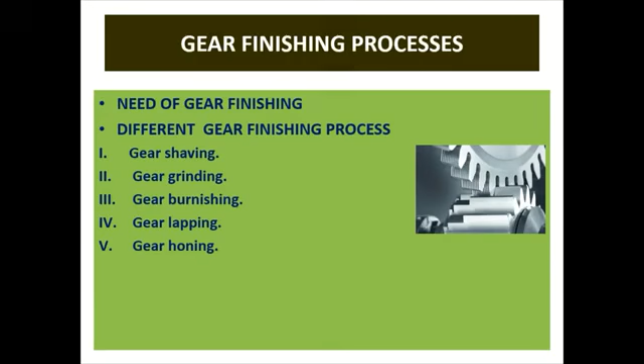Hello friends, today we are going to see the gear finishing process. In that we'll cover the following topics: need of gear finishing, different gear finishing processes. The first one is the gear shaving process, and the gear grinding process, gear burnishing process, gear lapping process, and gear honing process.

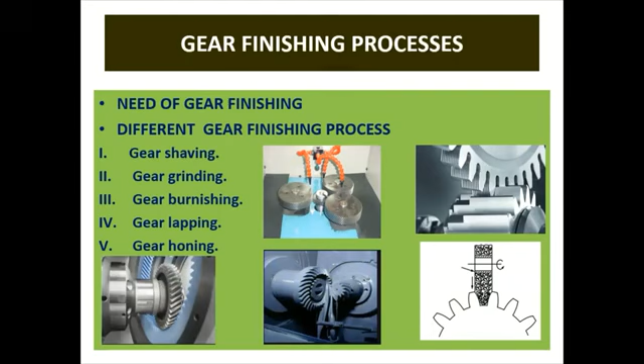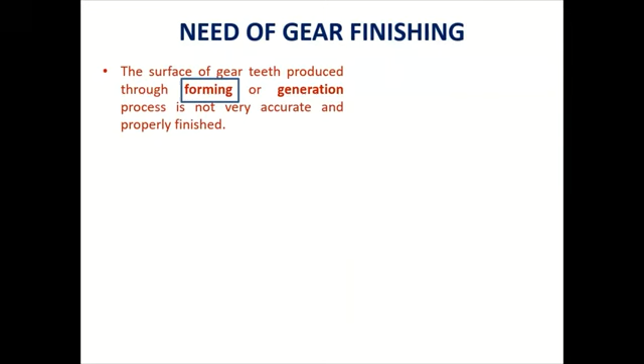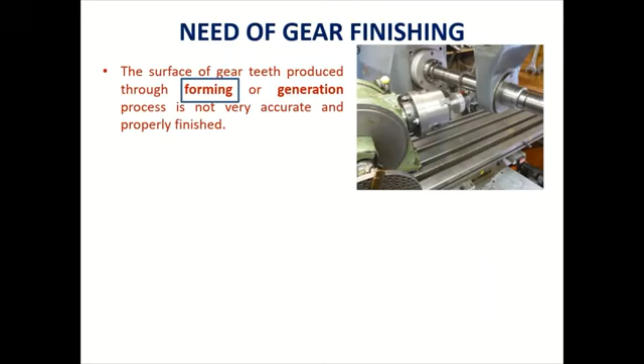So, need of gear finishing. The surface of the gear teeth produced through the forming or a generation process is not very accurate and properly finished. When we talk about gear forming, it means the gear which we have generated on the milling machine or a broaching machine. The other one is the gear generation process, like gear shaping or gear hobbing, on which the gear has been produced. So in both methods, we are not getting a highly accurate finished surface or gear.

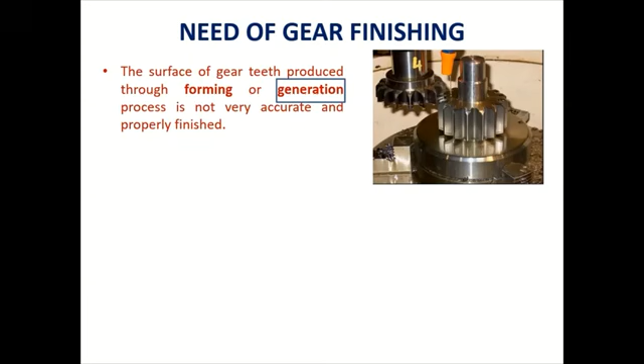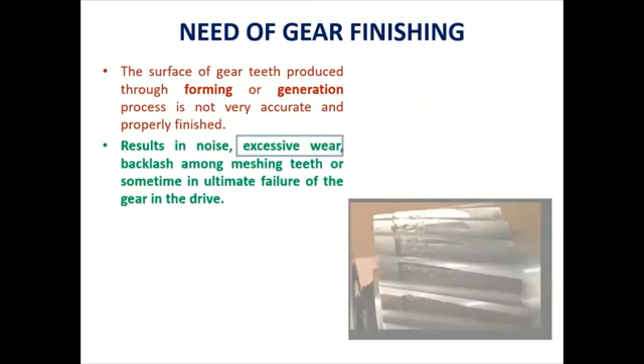Due to that reason, noise will take place between the two gears, or there may be excessive wear. You can see from this diagram, or even backlash between the two gears will take place. And many times the tooth may fail as proper finishing is not there. Even high load may act between the two flanks. So in such cases the failure may occur.

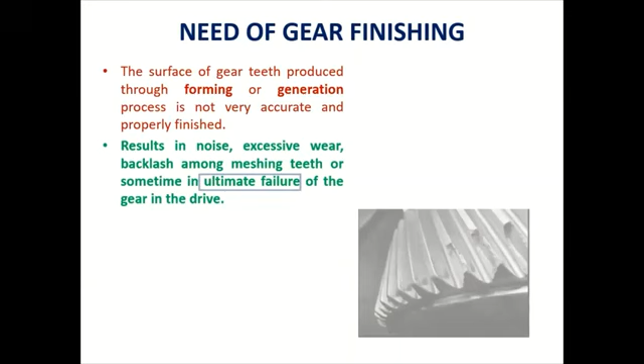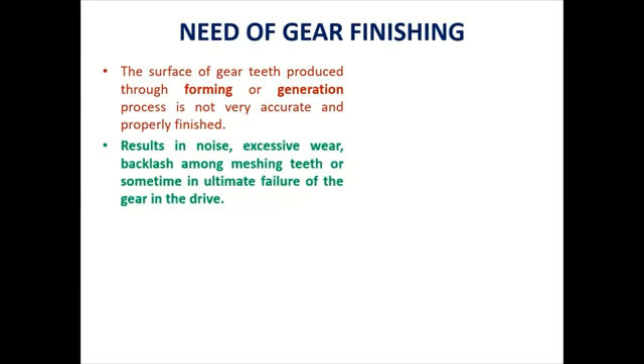So due to that reason, gear finishing is required. Even for smooth running, gear finishing is required, or to achieve high surface finish, or if you want to increase the life of the gear. So for all these reasons, gear finishing is very important.

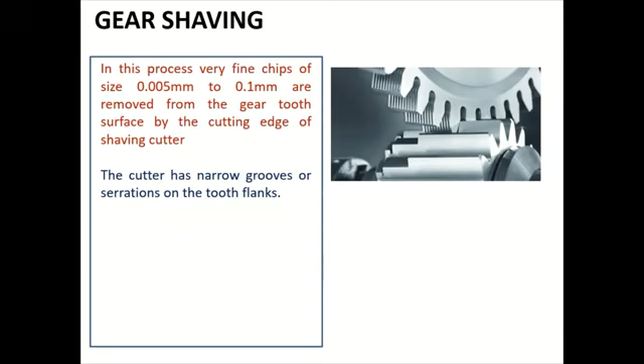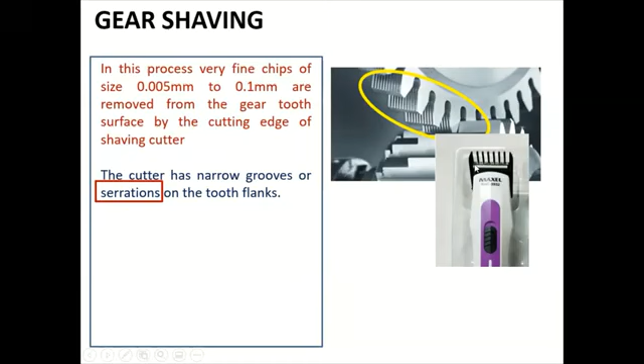Then the gear shaving process. In this process, very fine chips of size 0.005 mm to 0.1 mm are removed from the gear tooth surface by the cutting edge of the shaving cutter. You can see from this diagram, this is a shaving cutter which looks like a pinion. Over the flank there are narrow grooves, called serrations. This is a shaver, and over that there are a number of serrations we can observe. So this is what the serrations are.

The gear to be finished is meshed with the gear shaving tool, which is in the form of a rack or a pinion, and is also reciprocated simultaneously. First, in this diagram, this is the rack shaving cutter, and the rack cutter will move in a linear motion. The gear which has to be finished and the rack shaving cutter mesh with each other, and reciprocating motion is given, so that ultimately it results in finishing of the gear.

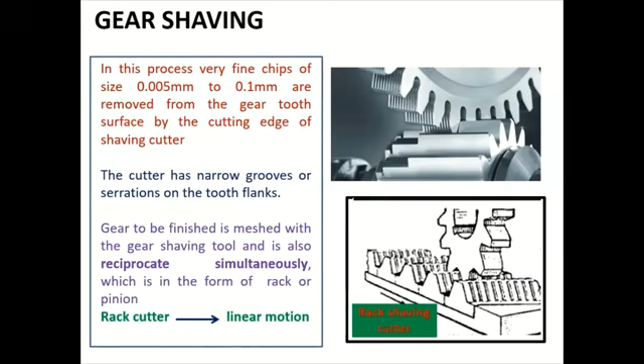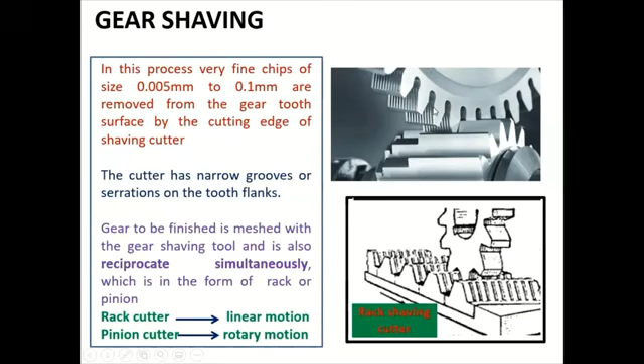Here this is a pinion cutter. In this case we are giving rotary motion to the shaving cutter, that is the pinion cutter. Again I'm showing the diagram of the serrations on the pinion. Here also a number of serrations are there on the shaving cutter.

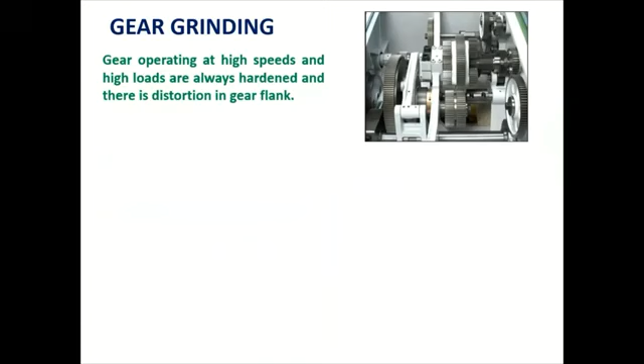Gear grinding. Gears operating at high speed and high loads are always hardened, and there is a distortion in the gear flank. In this diagram, this is a paper mill, or cotton mills, in which very high load or high speed is always required. Due to that reason we go for the hardening process on the gear. When we do the hardening, distortion will take place over the flank. This distortion we have to remove.

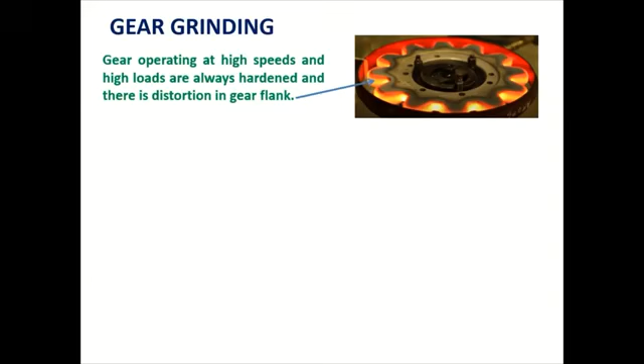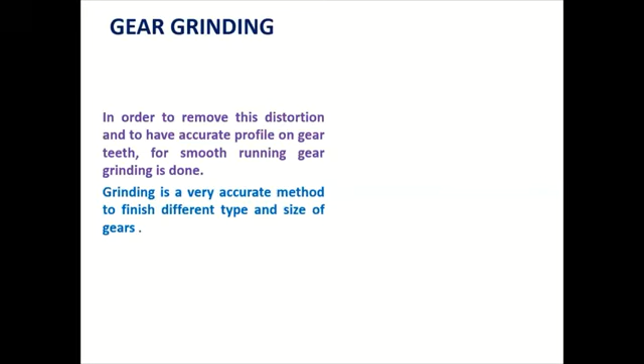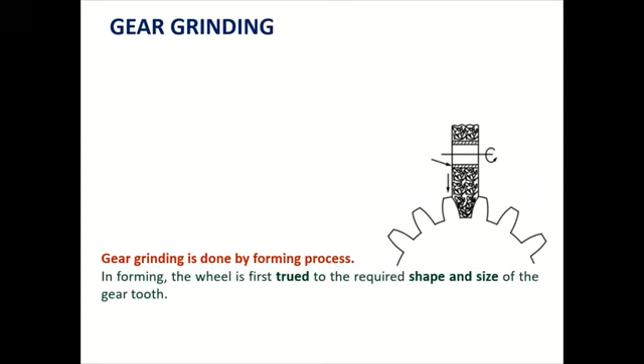In forming, the wheel is first trued to the required shape and size of the gear tooth. You can see on this diagram, we are giving the same profile as that of the gear to the gear grinding wheel. That is called truing, meaning we true the grinding wheel with respect to the shape and size of the gear tooth. So this is the forming grinding wheel.

The gear is mounted on an indexing head and the grinding wheel is fed to the required depth. Here this is the gear which has to be finished, mounted on the indexing head, and this wheel is fed against the gear to the required depth, and then the grinding wheel rotates. Once one particular tooth has been finished, we go for indexing of the gear, rotating it by one pitch, and again the grinding process takes place.

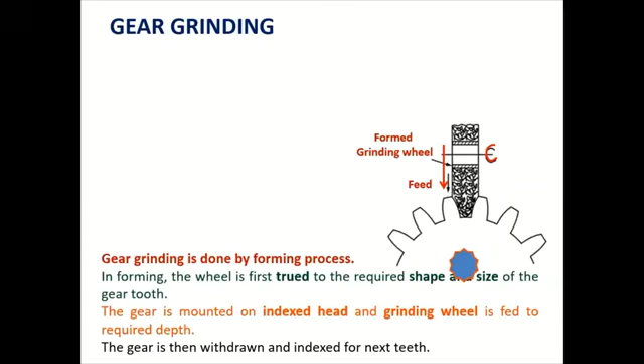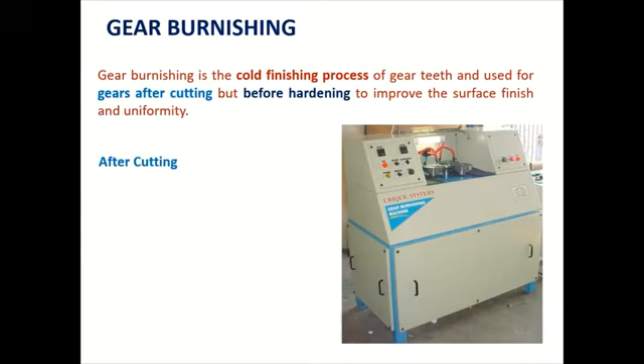Gear burnishing process. So this is actually the machine for gear burnishing. Gear burnishing is a cold finishing process of gear teeth and used for gear after cutting but before hardening to improve the surface finish and uniformity. Means when we are producing the gear on the milling machine, so this is just I'm showing that, means we are producing the gear on the milling machine, right?

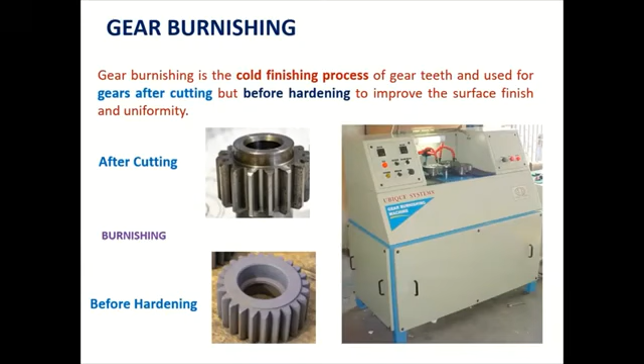And before hardening, so between that we are going for the burnishing. Means the gear burnishing will be done before the hardening, right? That is the meaning of that. So this is the setup of the gear burnishing.

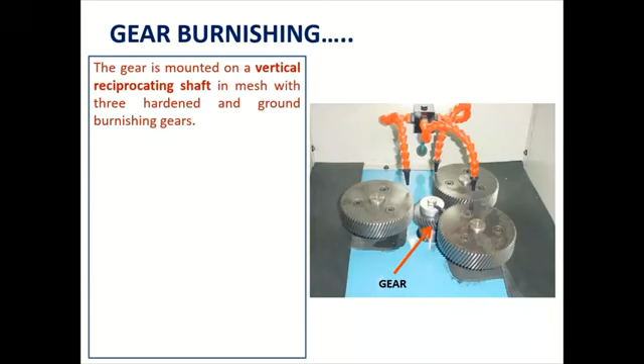In this case, the gear is mounted on the vertical reciprocating shaft and is meshed with the 3 hardened and ground burnishing gears. So you can see in this diagram, these are the 3 hardened and ground burnishing gears. Okay, and they are also mounted on the vertical reciprocating shaft. Means the gear which is to be finished and the burnishing gear, both we are mounting on the reciprocating shaft.

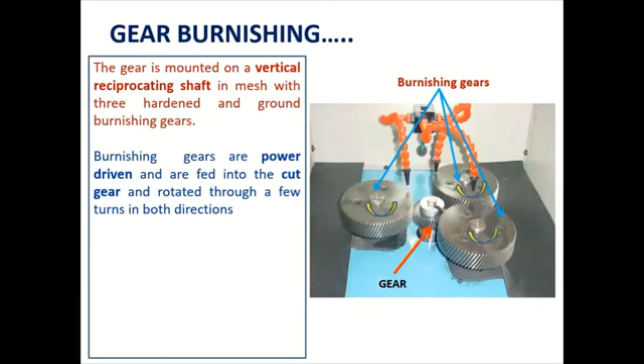Burnishing gears are power driven and are fed into the cut gear and rotate through a few turns in both the directions. So here we are giving the motion, means rotary motion to the burnishing gear, which are in mesh with the gear to be finished. Okay, so in both the directions we can rotate, means clockwise and anti-clockwise.

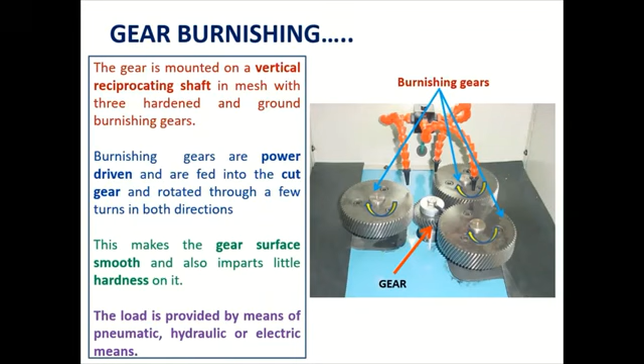This makes the gear surface smooth and also imparts a little hardness on it. So this is the advantage here, because more load will act on the gear, and due to that reason, as there is more friction, naturally the hardening will automatically take place on the gear. So for the load which is provided, we can use pneumatic or hydraulic systems or electrical means also.

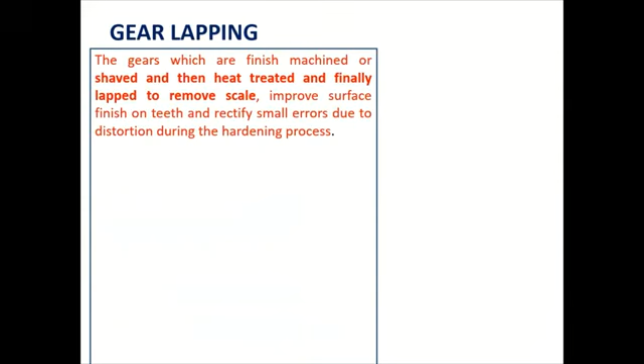What it means? So first of all, when we are generating the gear on the milling machine, right, or even on the gear shaping machine or a gear hobbing process, in that case, basically what we are doing, we are going for the shaving process. So after shaving, we are going for the heat treatment process, and then we can go for the lapping process.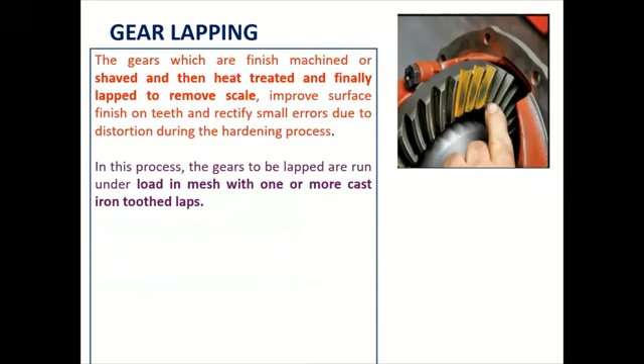So in this process, the gears to be lapped are run under load in mesh with one or more cast iron toothed laps. So I am showing this diagram here. This is the gear where we have to go for the lapping, and this is the cast iron toothed lap, and both we are meshing with each other, and between these two we are using abrasive particles, okay, or abrasive paste, which is introduced between the two running gears.

Now a negligible amount of metal is removed during the process. That's why I'm saying that in microns we can remove the material. So gear lapping helps in improving the surface finish.

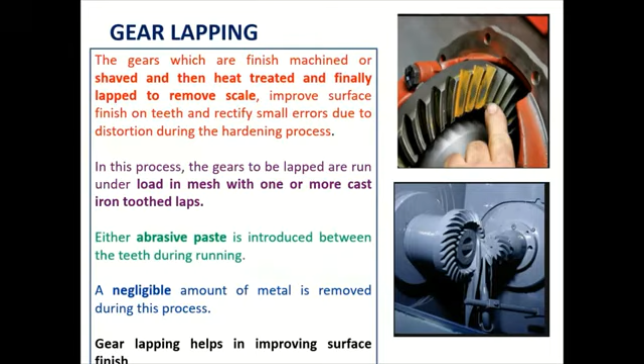Gear honing process. Gear honing is a particularly effective method of removing the nicks, scales, and burrs from the profile of the teeth after heat treatment by a gear tooth hone, which is an abrasive embedded plastic helical gear shaped tool. Means you can see in this diagram here, this is a hone tool. Means it is just like a ring. That's why it is called a hone ring, right? But it looks like a gear, and it is made up of plastic, right?

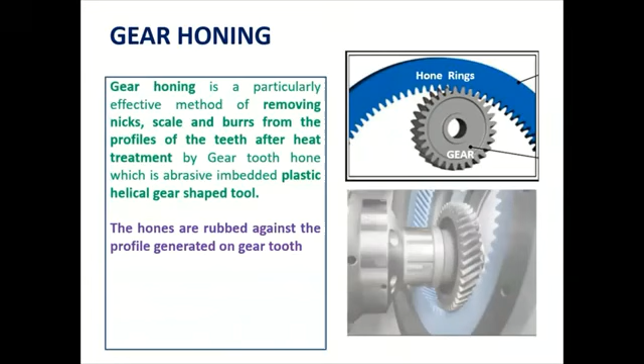And this is the gear. So both we are meshing with each other. The hone is rubbed against the profile generated on the gear tooth. So whatever the profile of the gear is, the same profile will be on the hone tool. Okay, and between them the rubbing action will take place. Here also we can see we are holding the gear on the spindle, and the hone ring we are meshing with the gear to be finished.

So in the honing process, the surface finish is 0.2 to 0.8 microns Ra, which is a unit of roughness average, right? So the surface finish unit is Ra. Ra is the roughness average. So again here also a very small amount of material will get removed.

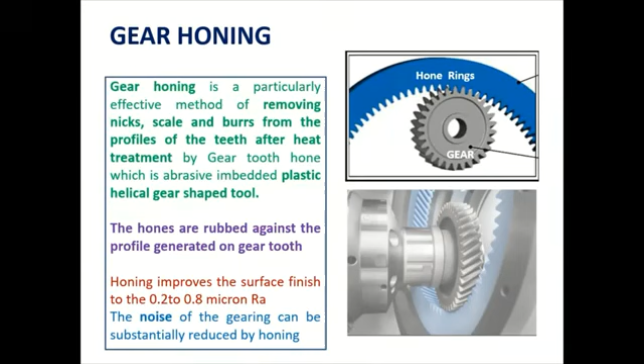The noise of the gear can be substantially reduced by honing. We can see many times noise will occur when two gears are running. But if you do the gear honing process, then we are almost eliminating the noise.